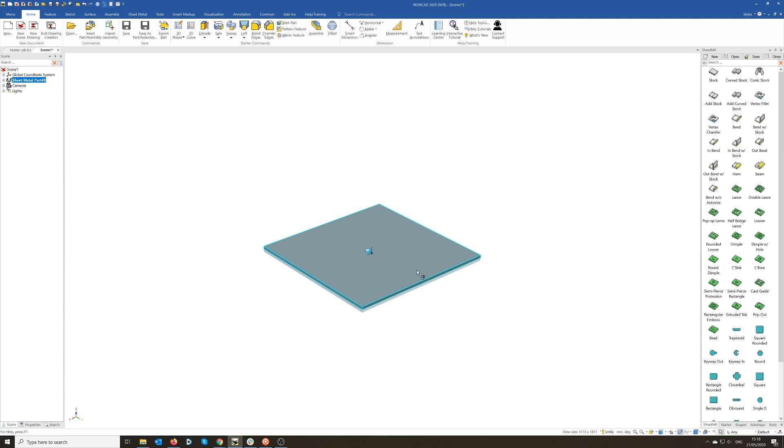So I want to make this one, and we said it's 700 deep, so I've got 700 this way, so put 700 on, and that allows me to grow both sides so it's symmetrical about that point. I'll do the same for this one here, and I'm going to make this one, we said 1500, so we do 1500. There we have the sheet metal top.

It needs a side now, so what I need to do is drop some sides on, and I have 2 different ways. I can do an in-bend and out-bend. In-bend means that the inner dimension is important, so that's what we'll keep at the 1500. The out-bend is the outer dimension is important, so you'll take material away to make sure that the outer size is within what you specified. So I'm going to do an out-bend.

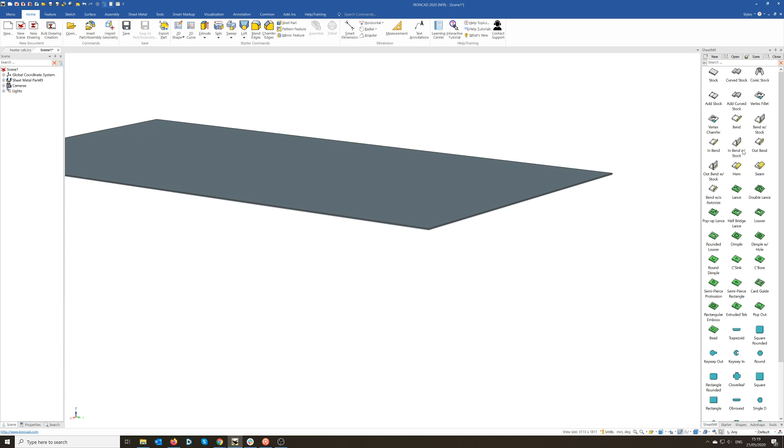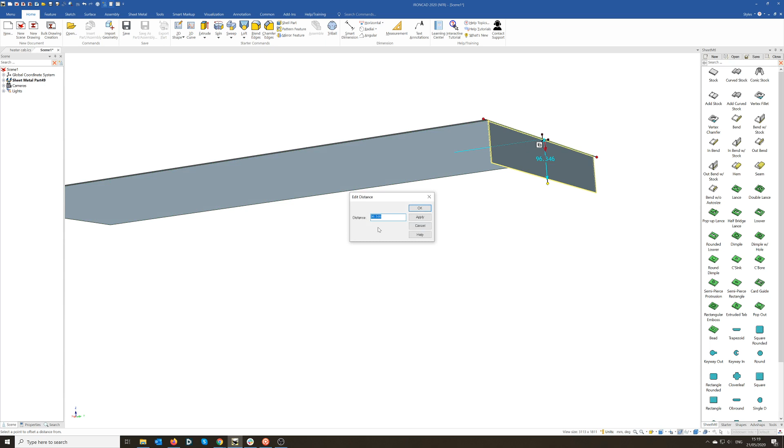I'm just going to drop it onto there. And it gives me these handles here, so if I want to, I can pull it down, or I can then right click on there and say I want to snap from a point. I want to just pick that surface there, and I said I need that to be, shall we say, 50 millimeters.

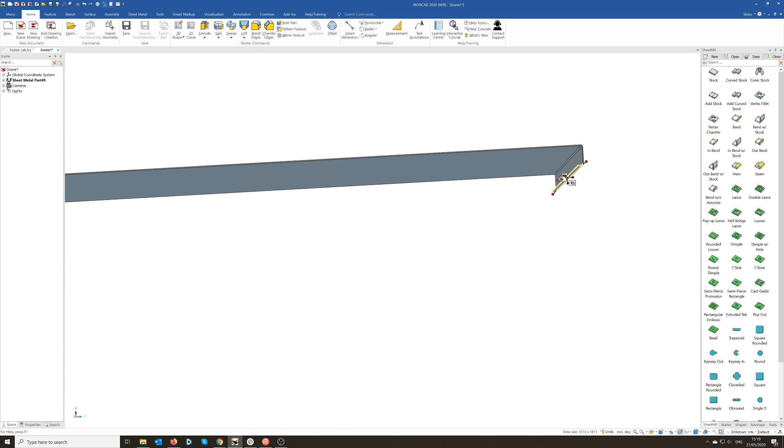I want to put a top edge in there, so what I shall do is another outer bend. I should just drop it on that corner, and I'm going to this time choose a value of 25, and there I've got the top one side made. What I need to do is I need to add it all the way around the edge. I don't have to repeat this.

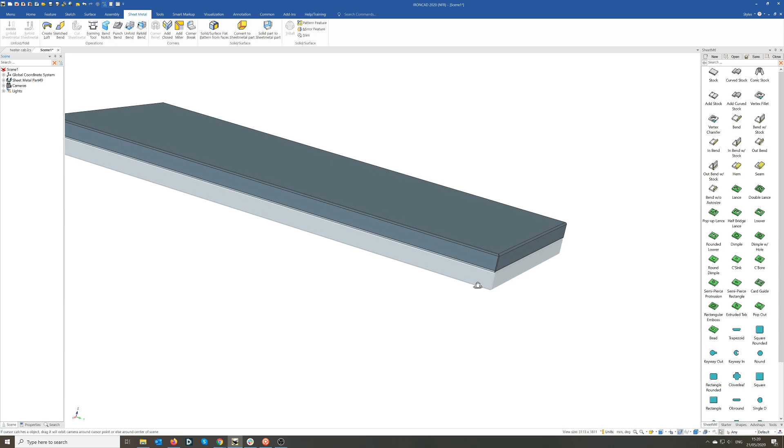I've got a great utility, so I go to the sheet metal tab at the top here, and I've got add miter, and then as soon as I select that, it asks me to pick what I want to add as a miter. So I pick those 2 parts there, I pick the edges, and I should be able to just pick those straight edges along there and say OK, and there it's created that top part.

So if I go to there, I can actually change the name. So I'm just going to call this plain top, and I'm working with stainless steel here, so I can go to one of my other catalogues with textures and I just drag in and drop chrome on that one.

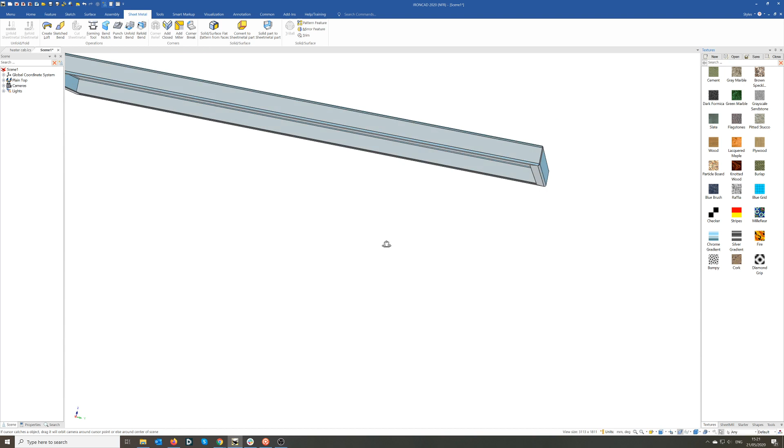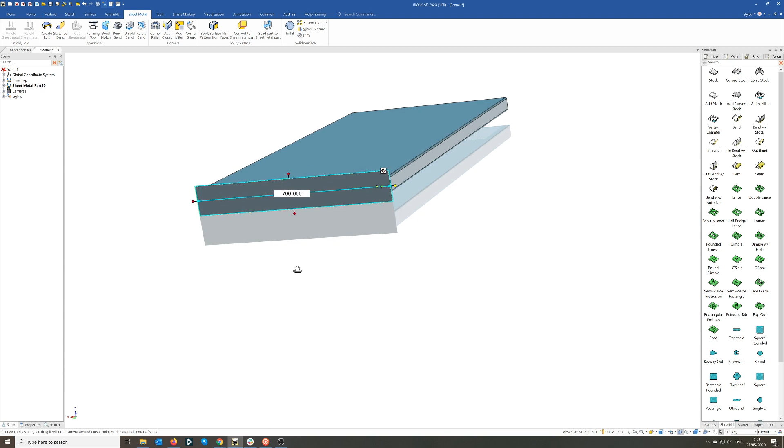So let's put some side panels on then. So let me add some more stock in. So I go back to my sheet metal, drag and drop a piece of stock on there, and I want the stock to be the same size as the width, so I just need to put it on like that, and you can see it has come through at 700. That needs to come down a bit.

I'm going to drop this one down to here because I want to pick that edge there, but you'll notice because I dropped it on the top, it's offset, which is obviously not what you want. So we use a TriBall, and we will move the TriBall to a position so that we can put it in the right orientation.

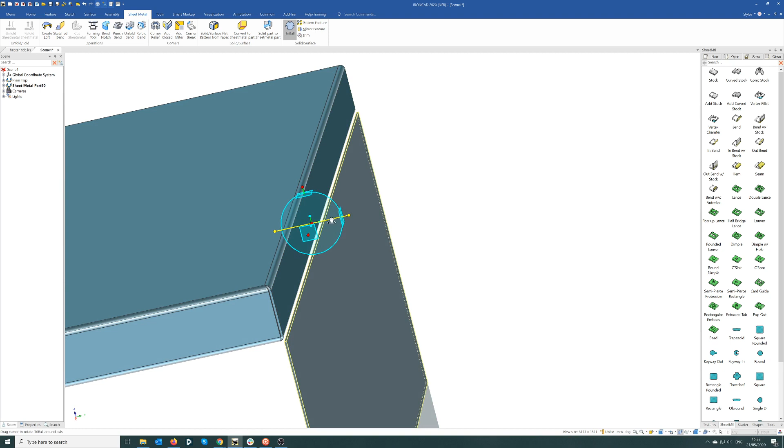If you see that it's actually on that face there, so I unlock the TriBall, I'm just going to move that up to that face. I then relock the TriBall and move it to that face there, and you can then see that it's in line. That's great. Turn the TriBall off, and I want this part here to be, and we said the height was 850, take off 50 for the top, so it's 800, 100 millimeters for the feet, so we call that 700.

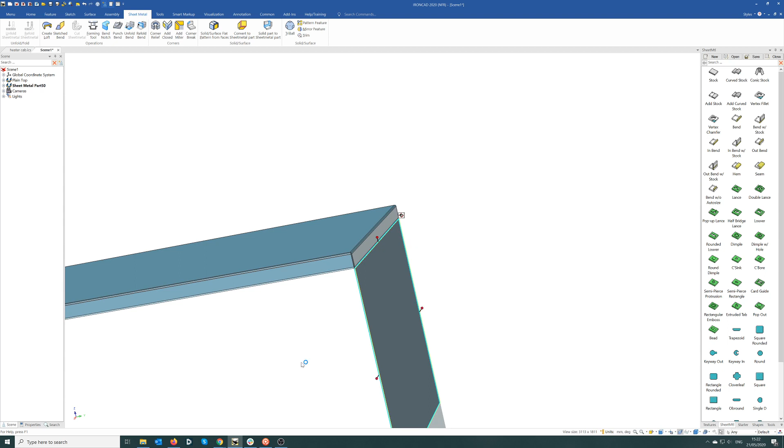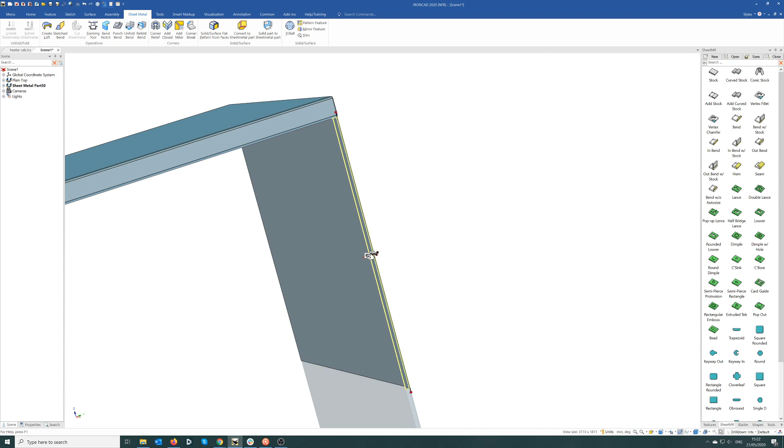And it's going to be a hot cabinet. Even if it's a chiller cabinet, it would possibly be double skin, so I'll just quickly knock another side panel on. So what I'll do is I'll do an outbend, because I want to keep that dimension the same, and I want to then choose a distance from point, and I'm going to choose that, and I'm going to say that is, if we look at the thing, I should imagine it would be, I would say, 25 millimeters.

I would then do another bend as well, so do another outbend, just drop it onto there, and I then choose distance from point, and I'll pick that edge, and I know that I want that to be about 25 mil, because that's what we made the thickness, so if we say 25 mil on there, and there I created one side panel.

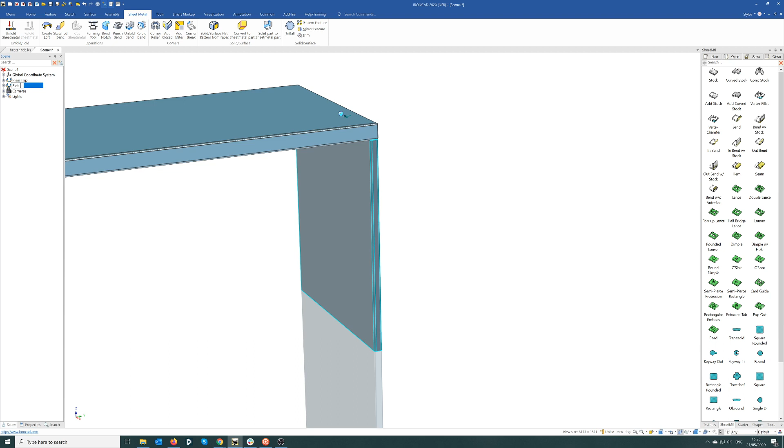What I need to do now is put this on the other side. I don't have to recreate that, I can just select that part. I'm going to call it side panel. I'm going to put the triball on, and I'm going to unlock the triball.

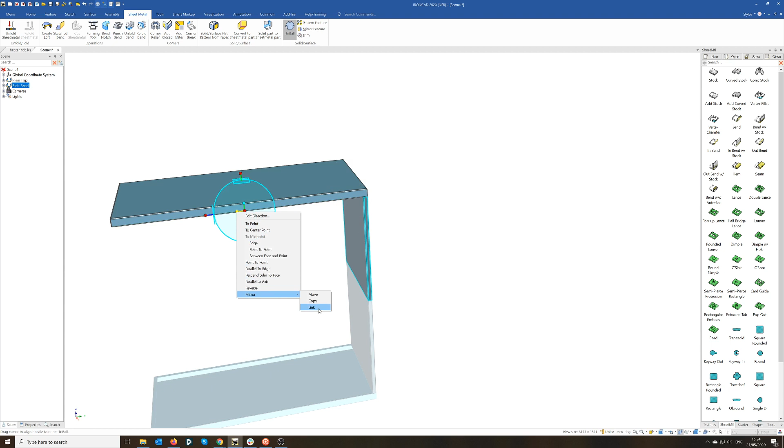I'm going to put the center of the edge of that edge there, relock the triball, and say I want to mirror link the other side. And there I've got two sides on quite quickly. Let me turn perspective off because I don't like that. And now let's put the back on.

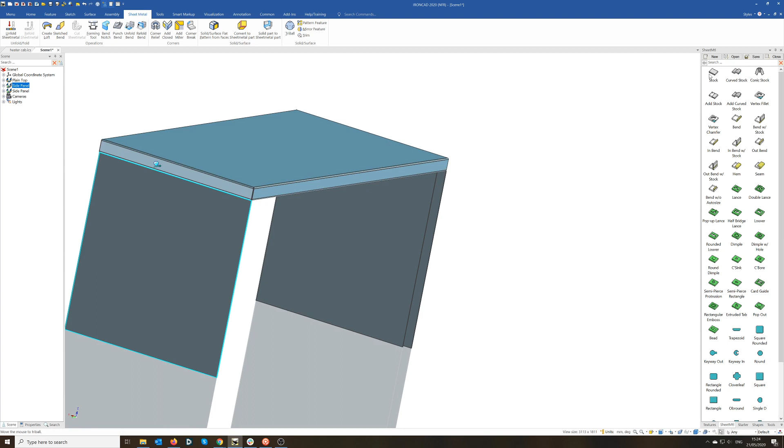And what we can do with the back is we can drop something on there. So let's just drop a piece of stock. Let's take it all the way down to that edge, and you can see that I don't have to keep referring back to other geometry and bits and pieces. I'm using the geometry in situ within the scene, which makes it very quick and easy to create what you want using existing geometry, which makes working with IronCAD such a pleasure, and you can be so much quicker as well. So let's just put that to there.

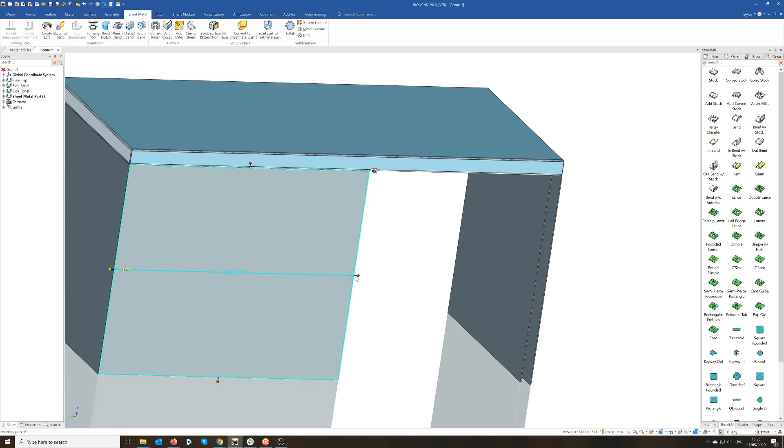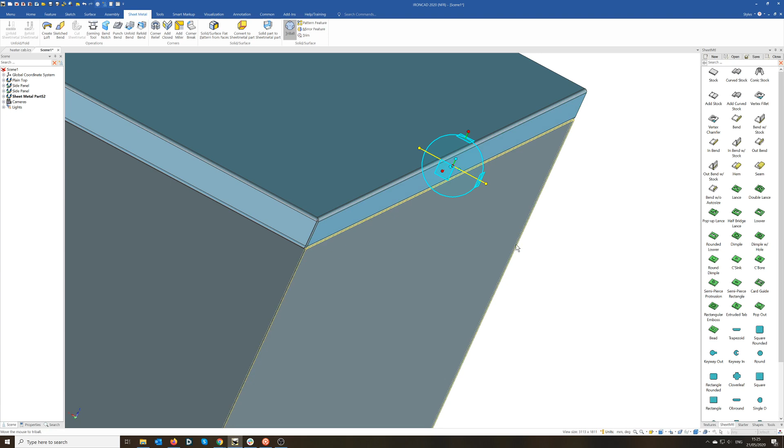Actually, I need to just move that back out because I need to pick that face there, and I'm going to do the same for this one to there. Once again, you notice our stock is slightly proud, so what I need to do is just unlock the triball again, fix it in axes, just say I want to go to there, relock the triball, and then say I want it to go on to that face there. So by using the triball, we've now made the back panel.

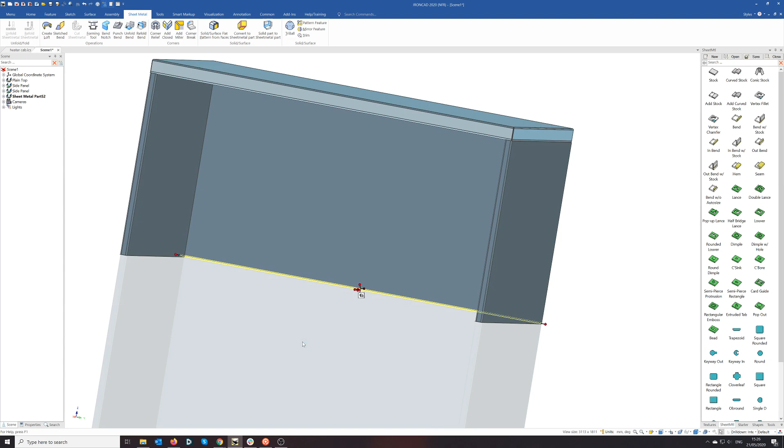But what I need to do is put the base. Well, I think you might make the base out of one because you don't want to keep welding and doing things up like that. So turn the triball off. I'm just going to do an outbend on that edge there, and so let's zoom out a bit. So let's just pick that point there and say I want it to go to that face. So we've got the base done.

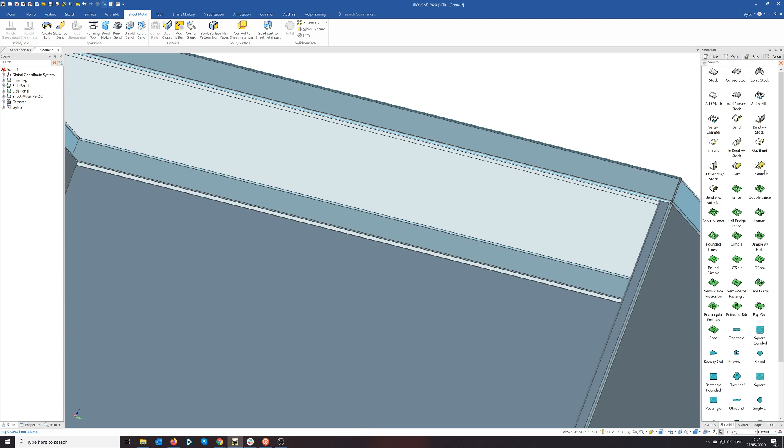We got the back, and I think that the back would be double skinned as well across the top. So I might actually just put a sheet across the back. So I'm going to go to my edge here, and I want to make sure I'm actually on the right part. Okay, I'm going to do an outbend on that edge.

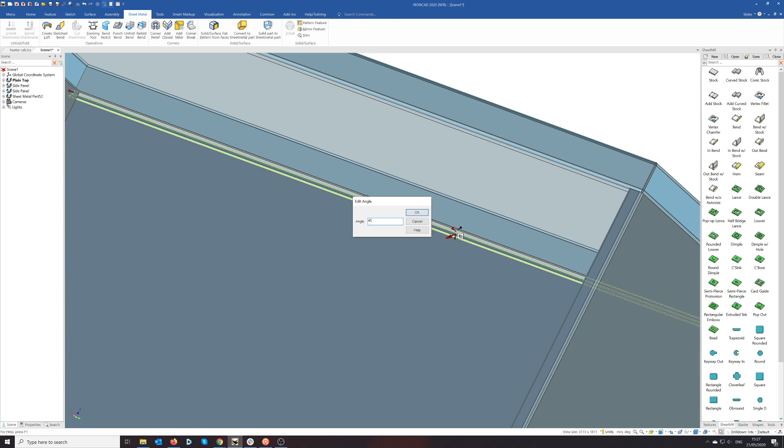It seems to have put that at a strange angle, so let's correct that. That's 90. Let's do that at, say, 45. That's not done that good at all, so I'm just going to delete that and drop that part in again. I don't know what happened there. I think I picked the wrong edge actually.

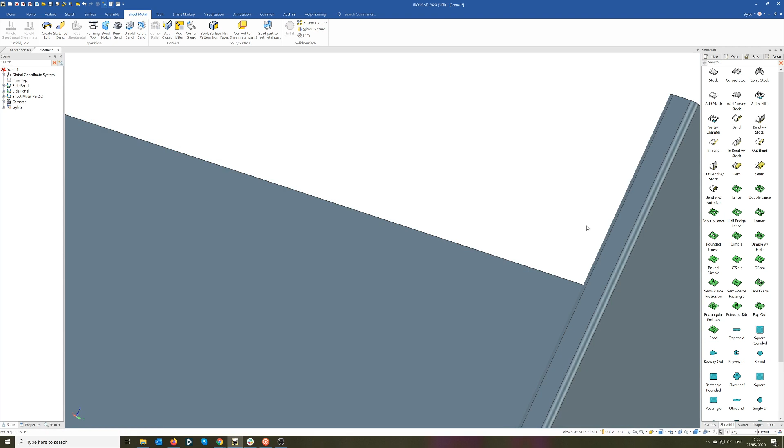Why don't I just hide selected, and that will give me the opportunity to put the right bends on, etc. So what I'll do is I'll do another outbend, and I shall just move this forward, and I'm going to choose that edge.

But what is interesting, because I've got a bit in the middle which I want to do, I don't have to go in and edit profiles. What I can do is, if I add stock, I can actually select that part there, and I'm going to then choose the stock size and say I want to go on to that. Let's just put that to there a moment, and there, and I shall then choose a value for there.

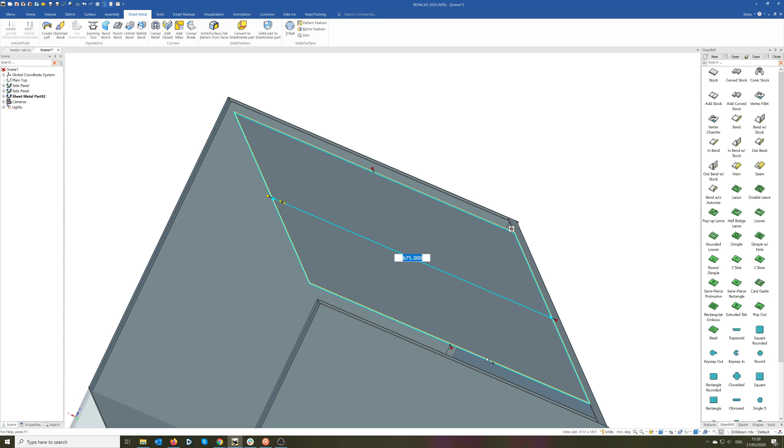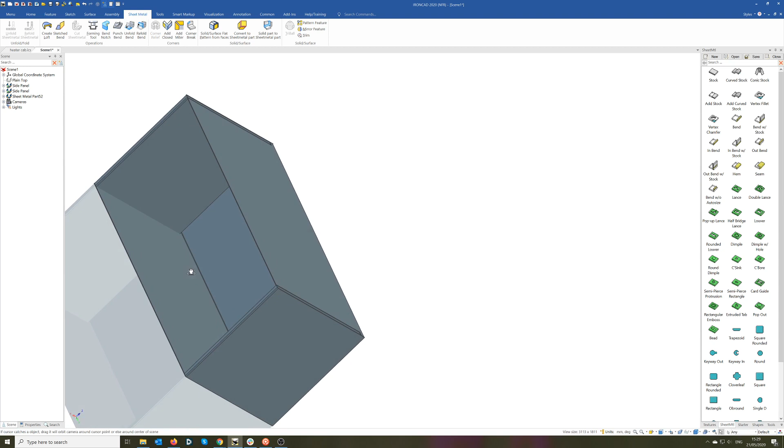So what I want to do is use that face and that face there. So if we now have a look at that, we've got the top which is joined to the bottom, so we can actually unfold that. So if we unfold that, let's have a look at that part, and there you can see it's done that cutout for the top.

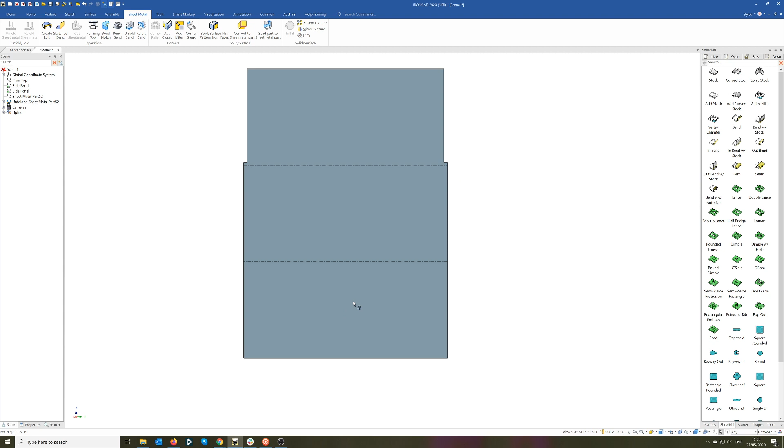Okay, now the beauty of the way that we're working, because it's free-flow format, is that I can say, actually, I didn't really want that part there to be from the base. I can actually utilize the part and do the back, or I could just add in an extra part for the back, but I'm not going to worry about that for the moment, because this is just an example of what we are trying to achieve here. So let me show all.

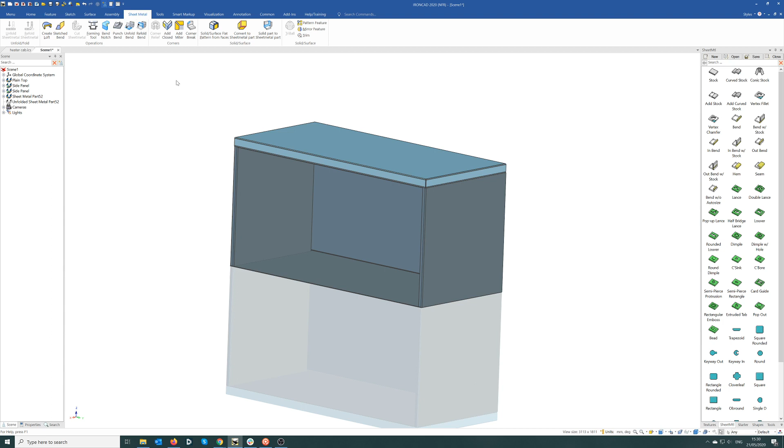Let's put the top on, and you can see I've got different materials. So what I can do is go to my visualization, do the eyedropper, and say I want, oh no, that one. So let's fill the eyedropper with that one, and then go and select them. Turn that off.

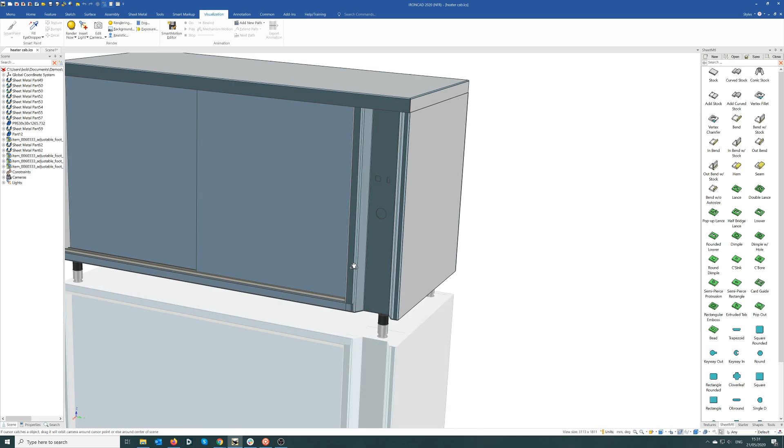And what I'll do now is I need to make the control panel. If you remember from the original picture, there is a control panel, and this is one that I made earlier, which you can see is quite an interesting shape. So it zooms in, it recesses in, and so forth. Now I can do that quite easily. So I will actually just make a shape like that, and I'll show you quickly how we do that based upon some dimensions.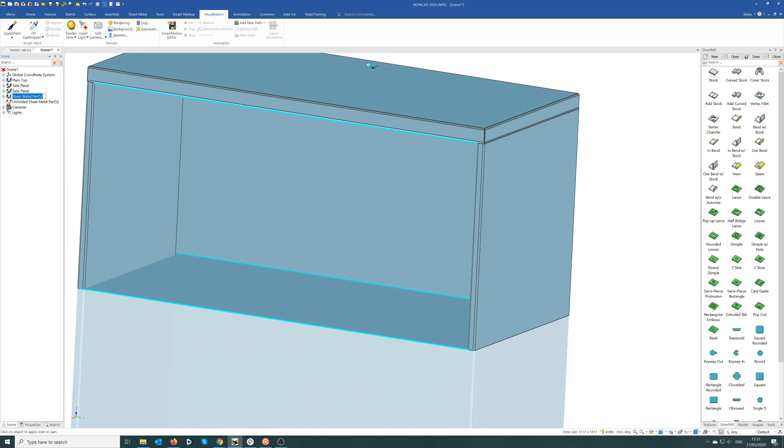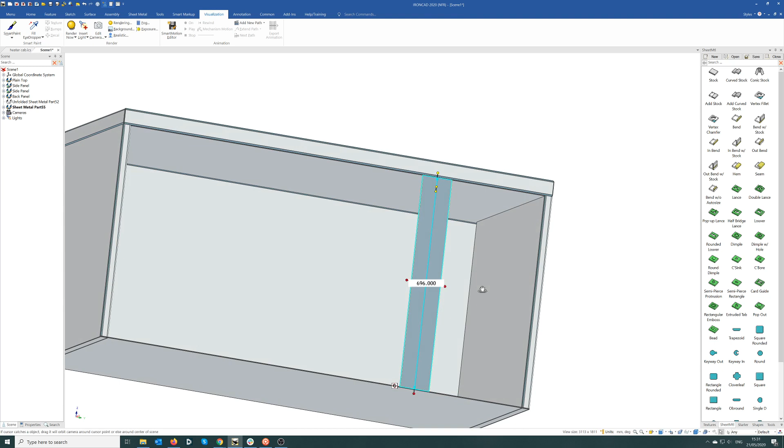So once again, I've got the sheet metal part, and I'm going to call that back panel. I'm going to drag a piece of stock in, just drop it on the top there. I want to drop it down to the floor there. Let's just zoom in a bit, and I want to take this and select that top surface there. Now I need to know the size, and I'm going to make this one, we'll say 80 diameter. So we made that 80 across there.

I need to put a bend on there, so I shall drop an in-bend this time, just for a change. And we can use the grab handles to choose the angle. I'm going to edit the angle and put that at 45. And take that point, and I'm going to edit the distance from that point there, and I'm going to make that, I don't know, 50 millimeters. You can make it bigger actually. Let's make that 100. There we go, that looks a bit better.

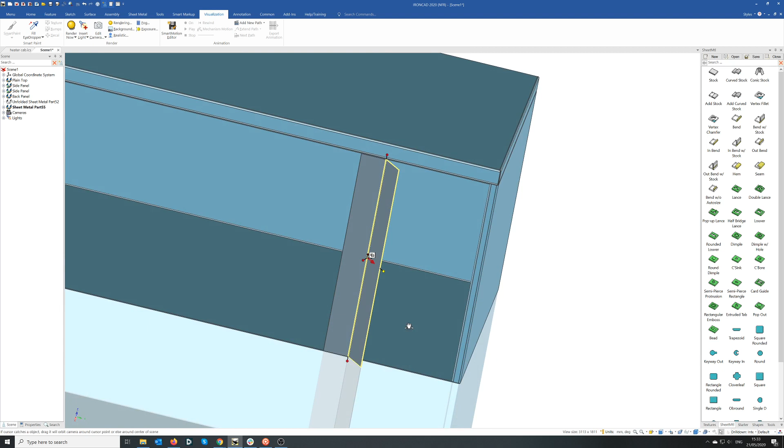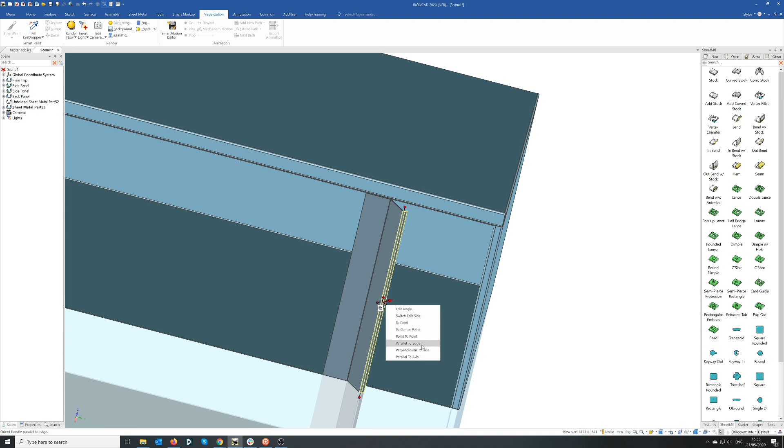I need to put a return on there, so I'll just do an out bend on that edge, and that has put it obviously in the wrong one, which is not a problem. It depends on the edge you pick. If I then select that, it will bend it the other way. And what I can do now is on the radius, I can right click on that. I want it parallel to edge. Let's just choose that edge there, and it's put that bend in line with that.

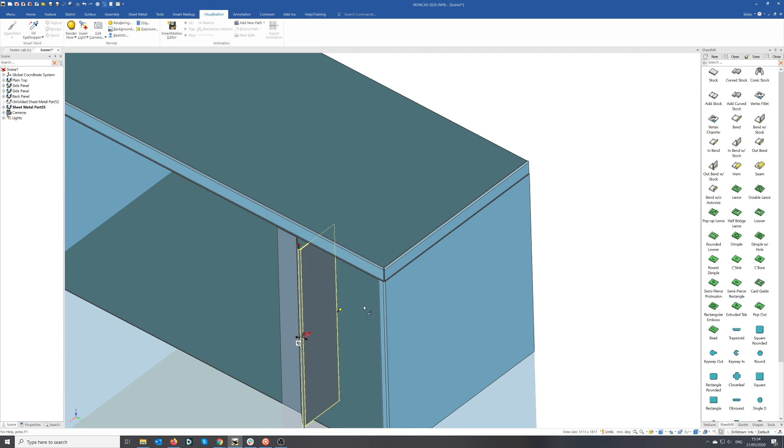I can then say I want to edit a distance from a point, pick that point. Actually, no, I won't. I'm going to drag that further in, then say I want to edit from point, because it goes normal to that surface, and if it's below that it'll try and shrink it so it disappears. And this time I'm going to make that 150. So I've got basically one side already created.

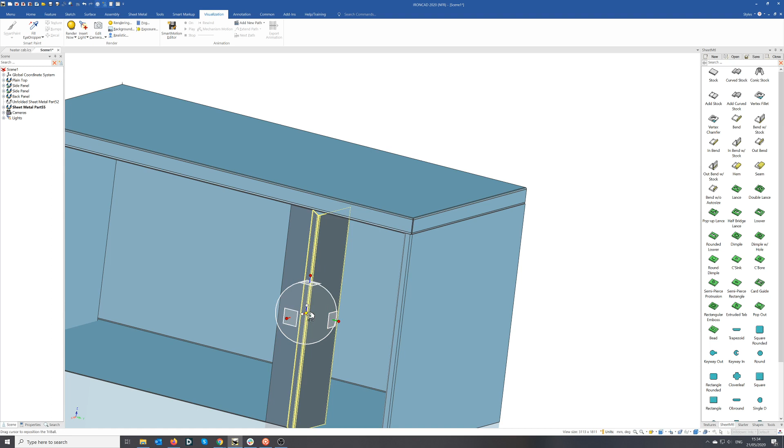I don't need to do it again. I just use the TriBall. As you can see, we use that quite a lot within IronCAD. Let me unlock the TriBall and just align it to global. And then I'm just going to move that and drop it down to the center point there. Relock TriBall and say mirror copy.

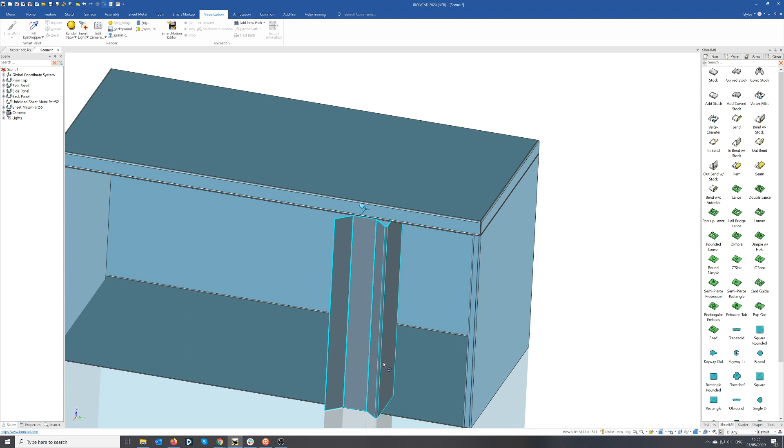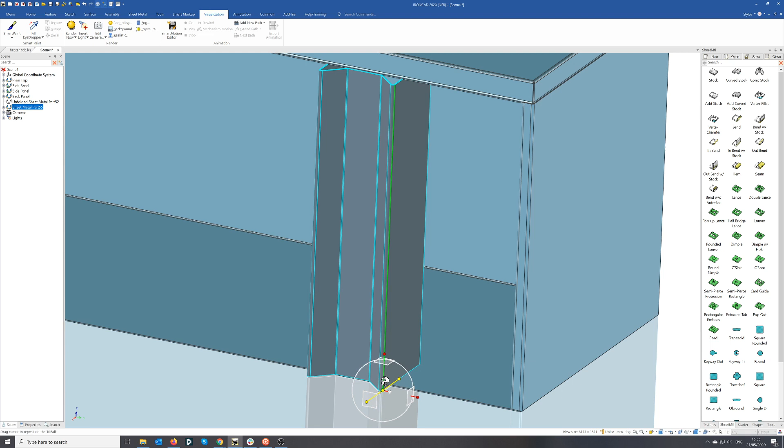So we put the TriBall to a position where we want to work from. So I'll unlock the TriBall. I'll drop it down to a point here, and let's put it on that face there. See, it's furthest point, and what I want to do is relock the TriBall, and I'm going to move that TriBall and I'm going to put it there.

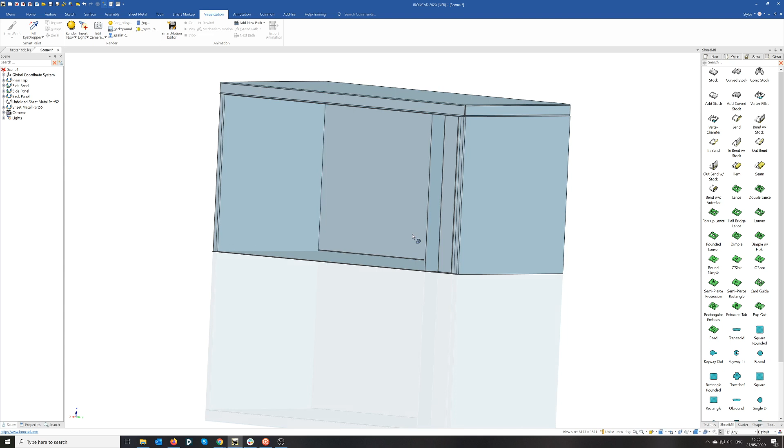And there we can see we've added in our control panel. I can go and change the color. So what I need to do now is add a runner at the top and the bottom to make sure that I've got the ability to slide the doors in and out. And the way that I'll do that is, let me just change the name of that first off. I'm going to call that control panel.

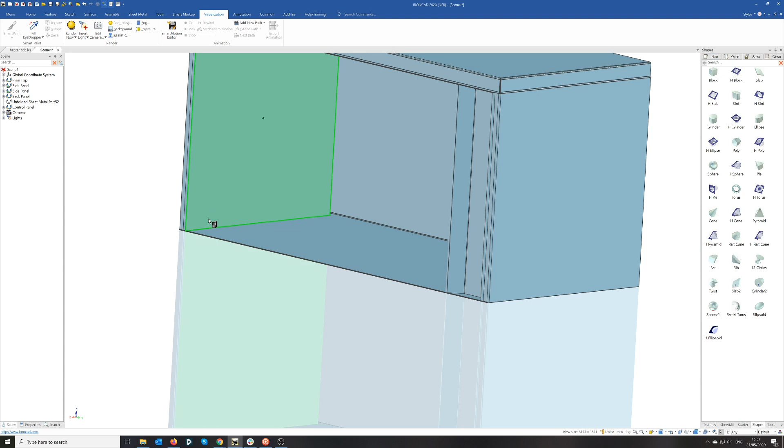The way that I'm going to do that is I'm going to not do sheet metal this time, but I'm going to go and drop a part in. I'm just going to drag and drop a part on that edge there, and I'm going to drop it as a new part. It asks me, it's a linked feature, do you want it on the other side? In this case I don't, but it's a really handy feature if you want to add parts to a linked feature, which will then be replicated throughout the model.

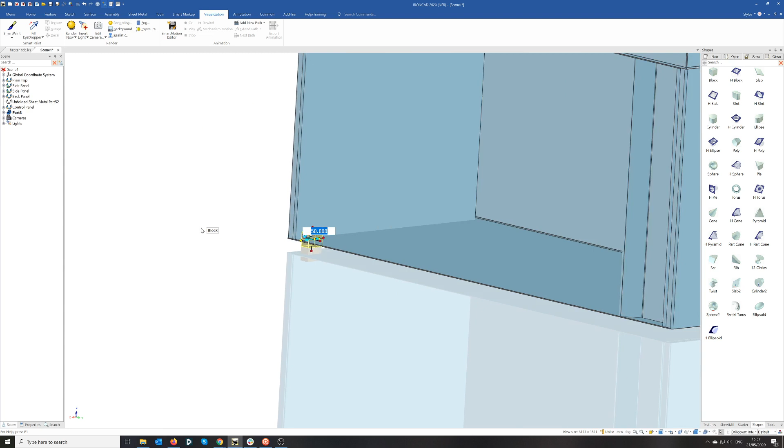And if I click on that and go to the IntelliShape grab handles, I can move this up to the points that I'm interested in. So I want to actually make this 60 diameter, and so that's 60. Let's just move that out that way, and that way is going to be 20 millimeters up.

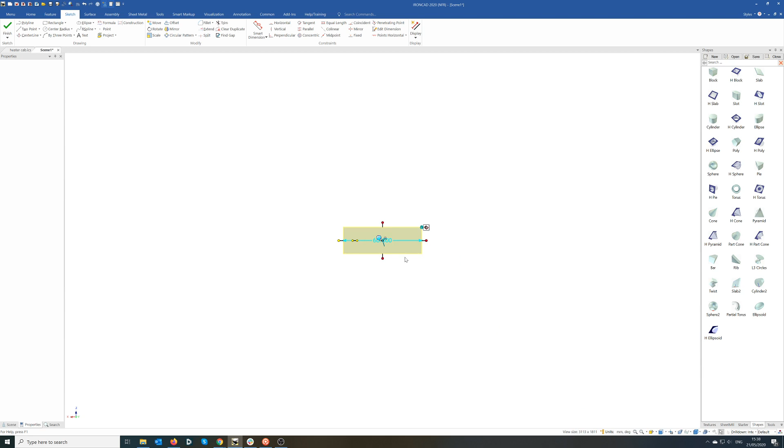Now you see the blue handle there, that's telling me the way that the extrusion's going, so I know that if I want to edit the profile shape, it's going to be on that face there. So all I do is edit the cross section. Let me put it in position so I know which way I've got to build my profile. Okay, so let's hide all. Just look at this, normal to that. Let's zoom in a bit.

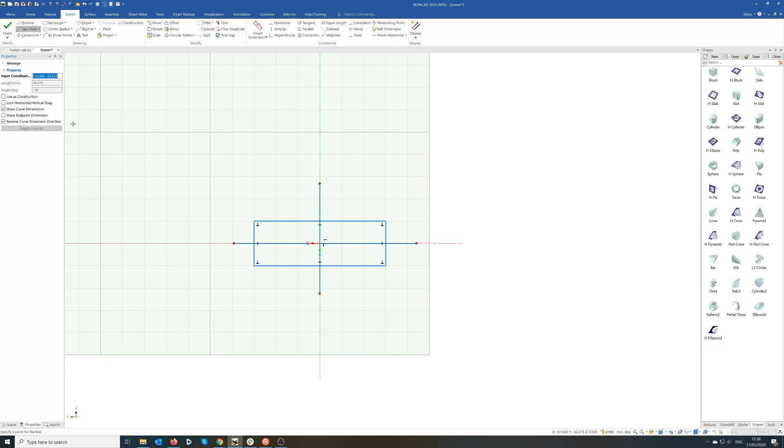So I need like a castellation there, so I want 2 runners down there. So what I'll do is I just add some geometry in. I'm not too worried about what I'm doing here at the moment. What else do I need to do? Yeah, I think I'll do an offset around the middle. I'll just pick that line there, and I want it bi-directional. I want it 5.

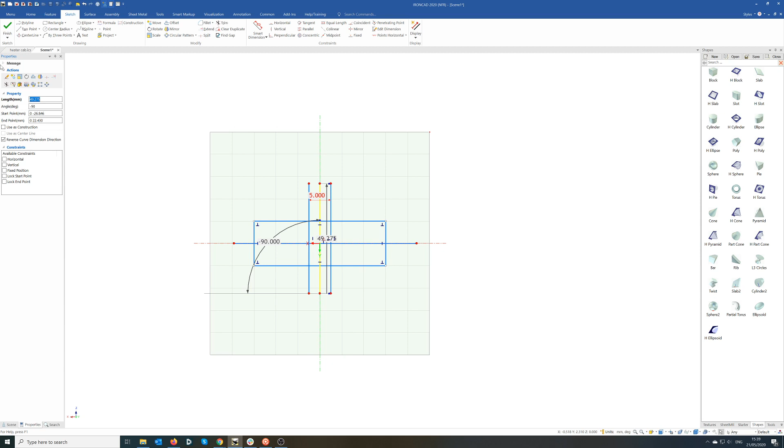Okay, I want to mirror, move, but I'm going to do a copy. I'm going to make it in the X, 10. Sorry, I need to cancel that one because I've got the wrong line selected. I need to select that one and that one, and I want to do an offset. I don't need it bi-directional. I just need to flip the direction in, and it needs to be 10.

Okay, so I just need to trim away the parts I don't need now. So if I go to the trim section, I can take out those parts that I don't need. It's saying you've got a number of curves on there. Do you want to continue? Because it will take them out. I'm saying yes, that's fine. I do want to do that. And I want to say yes. And let's have a look.

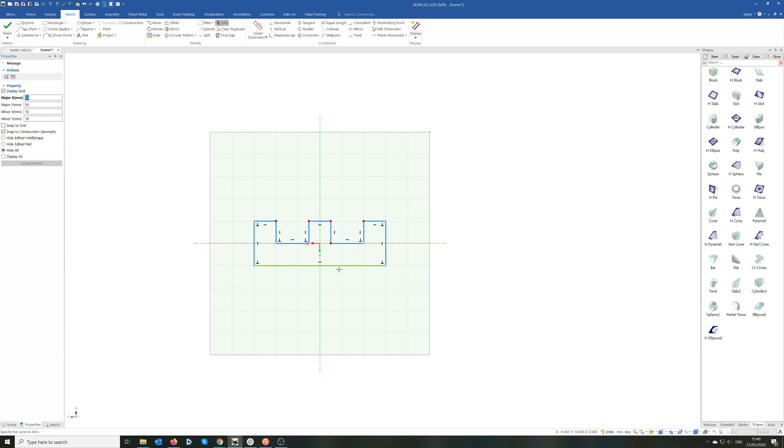That looks like we've got all of the parts there. Let's then make sure we've got no duplicates. So I'll select them all. No, there's no duplicates in there. Those red ones mean that the entities are not closed, which I just want to make sure that they are.

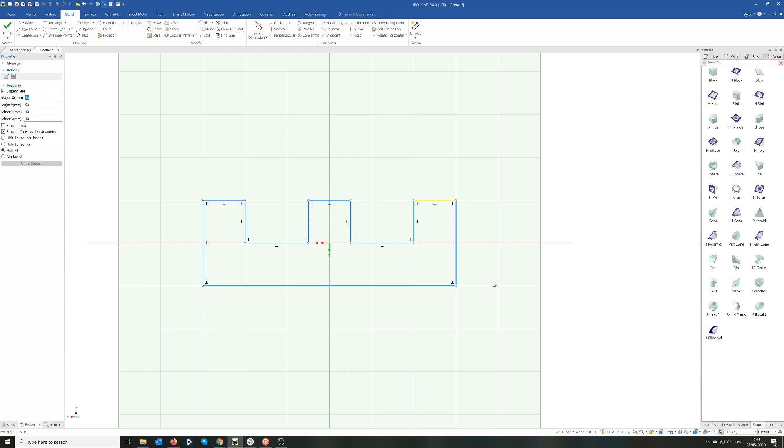And it's all white, there's no red parts in there, so we can just say finish. And there's the profile. I want to just take that edge and put it onto that one. And there we've got

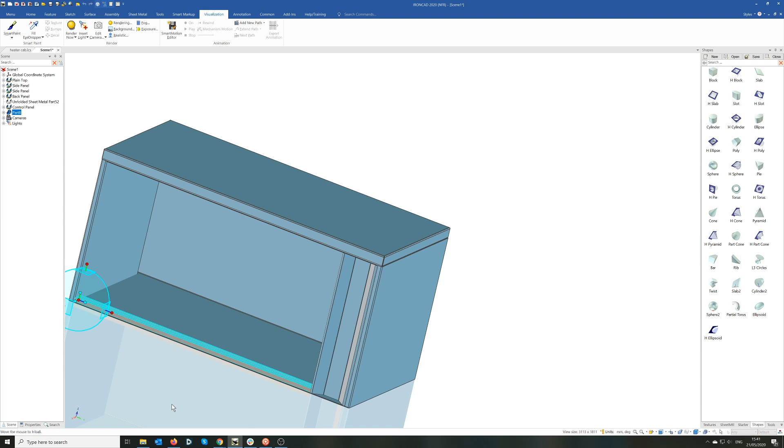the bottom runner. Well, guess what? If we want to put one on the top, we turn the TriBall on. So what we can do is unlock the TriBall, say center of edge, pick that edge, relock the TriBall and say mirror link, and there we've got our two runners in position.

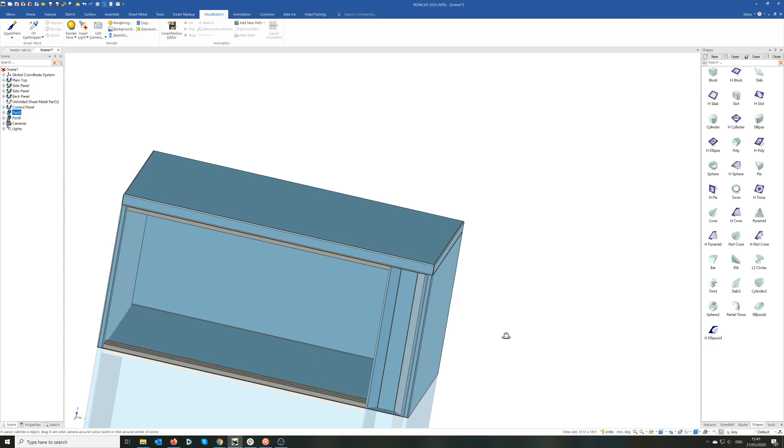The remaining thing to do is to put a door on. Actually, there was something I could have shown you on the control panel which I didn't do. So if I go back to the control panel and click on the sheet metal tab, I can drag and drop in a punch, and by clicking on those dimensions, you can move them around so you can position it very accurately.

I just put the center part in, and if I zoom in, because the default is quite small, then right click and click on tooling properties, so you have standard size punches, which you can put in, or you might only want to use certain ones, or you can put your own custom ones in.

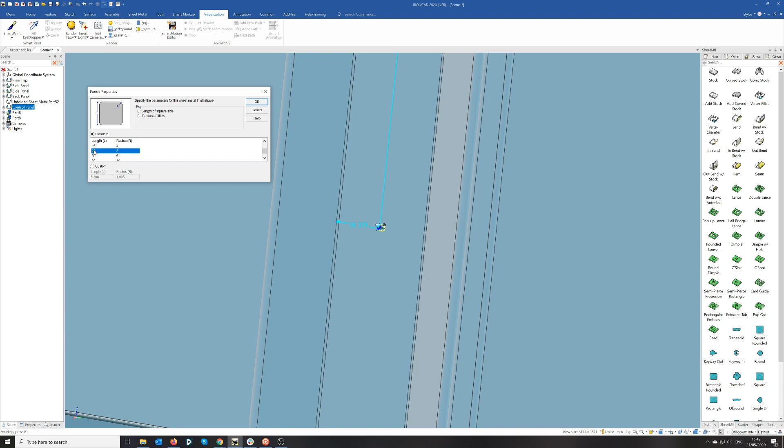So I'm just going to put 16, let's do 20 by 5, and it's made a punch hole in that control panel. And the reason I've done that is when I finish doing the doors, you'll understand why.

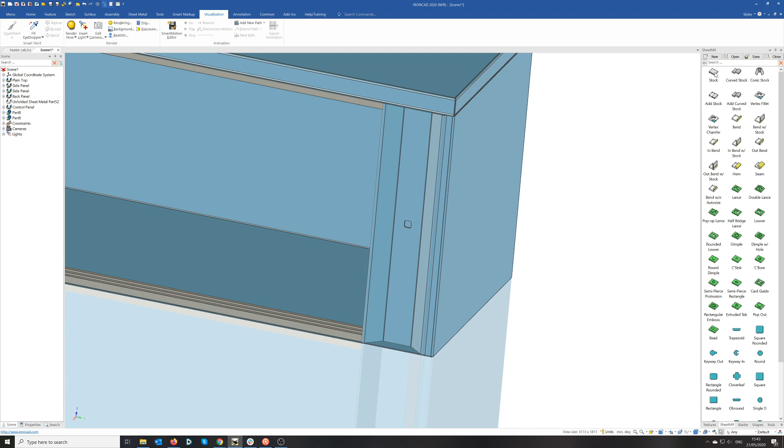So I have the cabinet in position. All I need to do now is add in a door. I'm just going to do them single skin, but they will normally be double skinned with a handle on. I'm just going to do single skin to start with, just to show you.

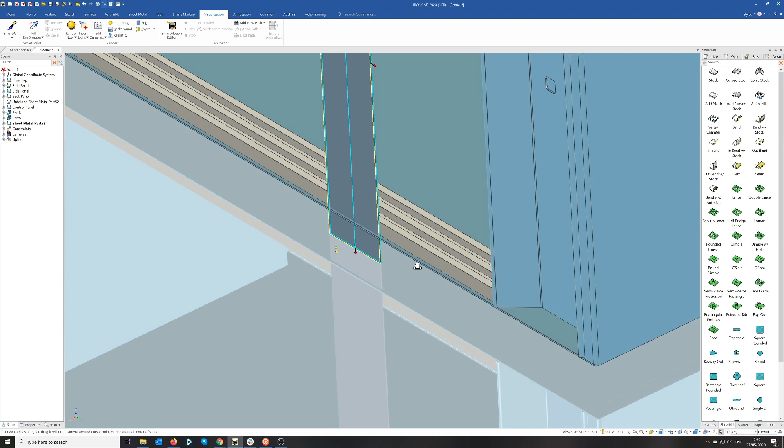Just drop a piece of stock in. Obviously I need to move it into position, so let's just move this up a bit. So let's zoom in and have a look. I want that stock to be on that edge there,

I need it to be up on that edge there, so I'll just move that up to that point, and it looks about right. So I'm just now going to zoom out a bit, and I want it that side in line with there, and let's just assume that it needs to be halfway along.

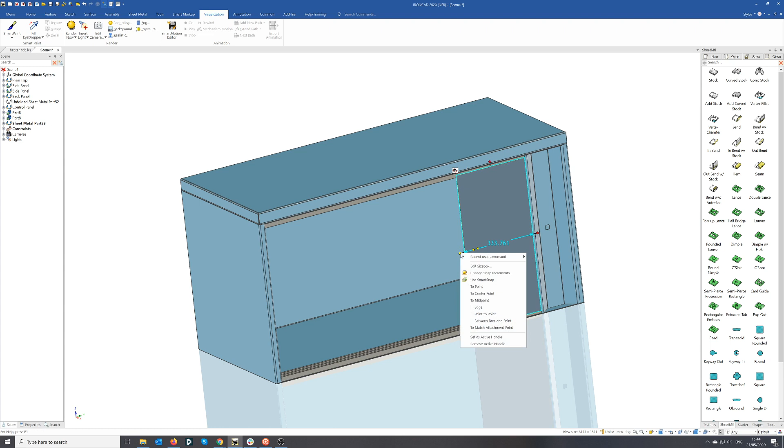They're normally either slightly over or whatever, but for the moment we'll do the midpoint, pick that edge. And obviously, once again, we put it on that top face of the stock, so it's in the wrong place. What I need to do is just say, okay, let's put that to the midpoint

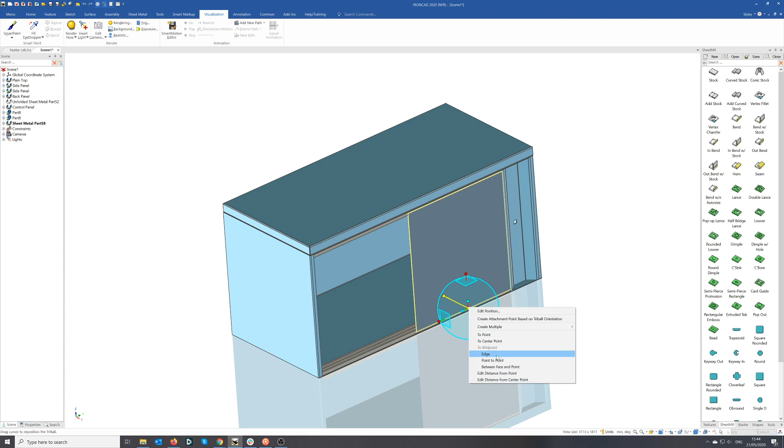of an edge, and I can then zoom in down here. I want to choose that edge there, and you can see it's put it in the midpoint of that there.

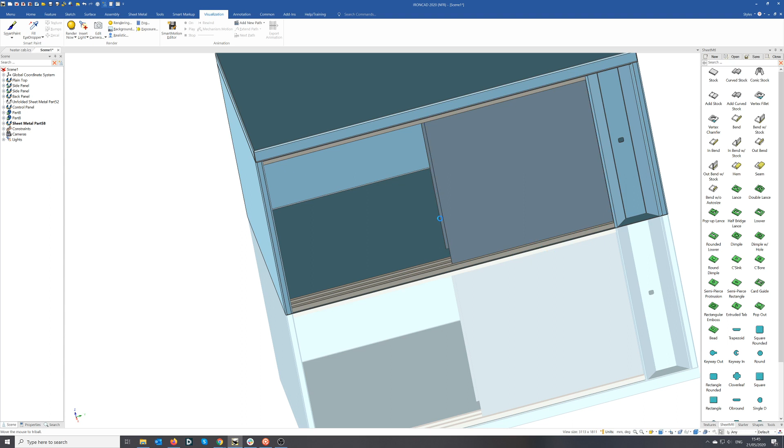While the tri-ball's still selected and there's two doors, I'll just move that forward, and I'm going to create a copy here. Just going to say okay, turn the tri-ball off that, select the second part there,

and I'm going to move that. So I'll put the tri-ball on, and I'm just going to move it out. I'm going to lock it in position there. I want it to be the midpoint of that edge down there.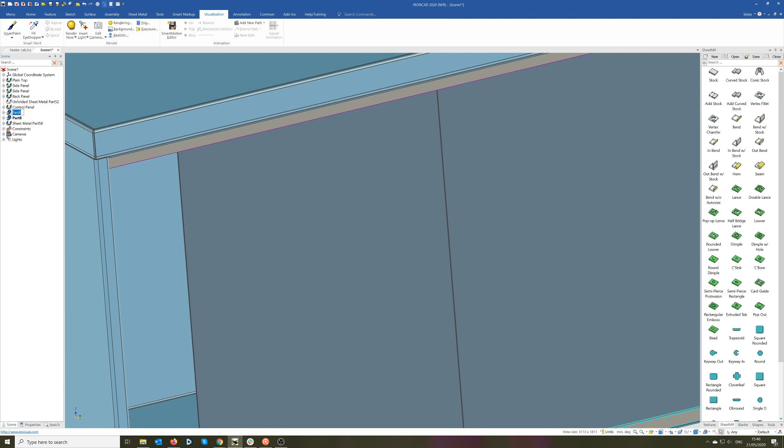And I'm just going to move that out to a point there, so it's showing the door open. Turn the tri-ball off and zoom out, and that is part 8, called door. So we've got two doors, and we've got the cabinet pretty much completed.

Obviously you could do more detail and fidelity on there, but basically that's briefly giving you an idea of how you would quickly make a cabinet. But there's a couple of things missing. There isn't any feet, and there isn't a control knob.

So actually, if we go to add-ins, we have two features which are part of IronCAD, called TraceParts Community and CADENAS. CADENAS is all electronic parts, and you have a mixture of electronic and mainly mechanical parts in TraceParts. You need an account, but then they produce, you can then download and get models.

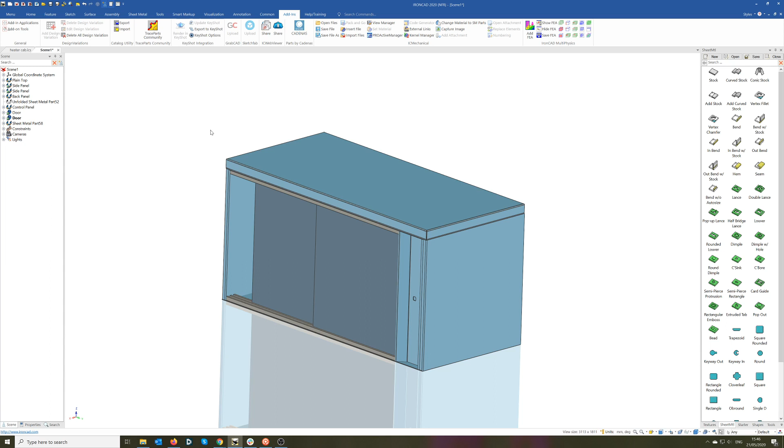So if I was to just say, for argument's sake, I wanted to add in a part here, like a control knob, it will actually bring and drop a part in directly for you. So if I do a search and I put control knob. Let's have a look.

It'll do a search for all these command words that you've looked at, and if you wait for it to populate properly, and scroll down a bit, that's the one I was looking at. It brings the part in, enabling you to have a look at it and see if that's what you want.

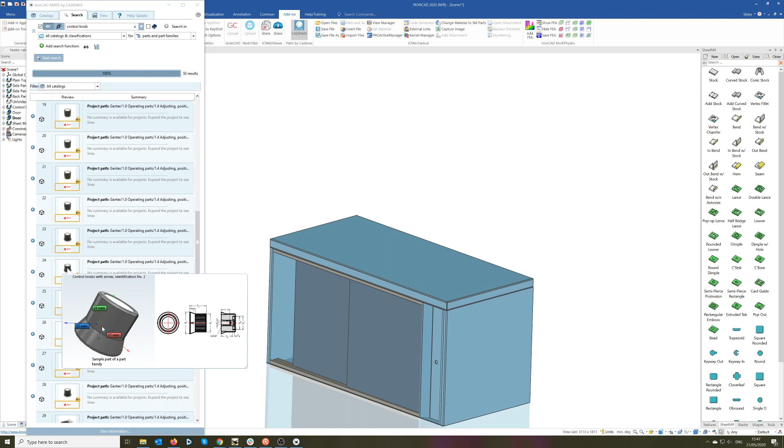If you say yes, you can then open the part and rotate it around, making sure the dimensions are correct and everything. Then all you have to do is add that part to IronCAD by saying transfer to IronCAD. As soon as you do that, it'll bring the part in and drop it on the IronCAD scene, and there we go. I can then stop that and open it up.

Let's put the triball on, and move it out so you can see. Just zoom in, and there we've got a control knob which is actually in the center.

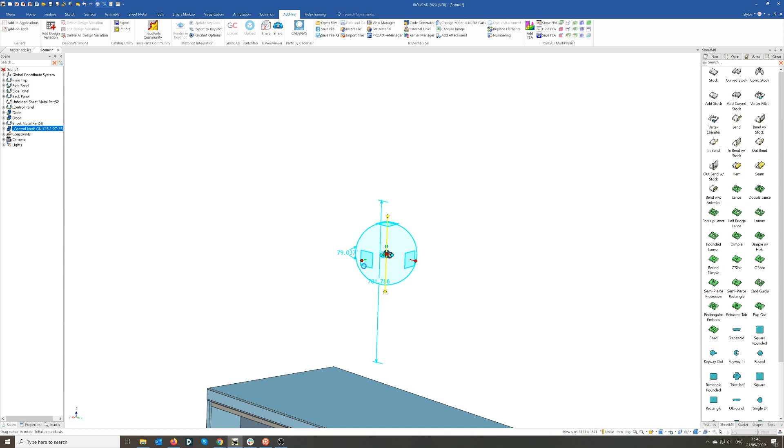Let's rotate it round this way so we've got the right orientation. Let's make that 90 degrees so we're in the right orientation, and what I'll do is drag and drop it down to here. Whoops, went in a bit quick there.

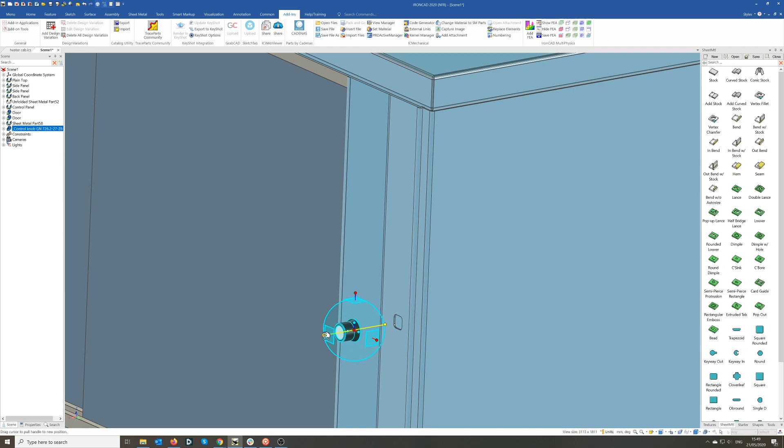Just move out a bit. I want it to be the center point of that edge, just to put it in the right place, the center point of that edge, and then I can say I want that to be on that surface. There we go. Turn the triball off, and there you have your control knob on to adjust the temperature, etc.

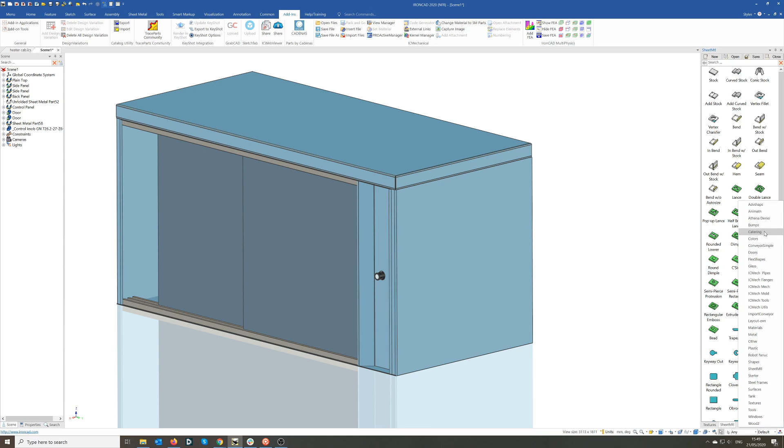I have some others. You do the same thing with the TraceParts community to get some feet. What I've done is I have a catalogue which I've saved called Catering, and I have an adjustable feet there. So if I select that and just drag and drop that part in, you can see it drops the part in.

It's in the wrong orientation. Let me just move that out a bit. Let's rotate that round 180 degrees.

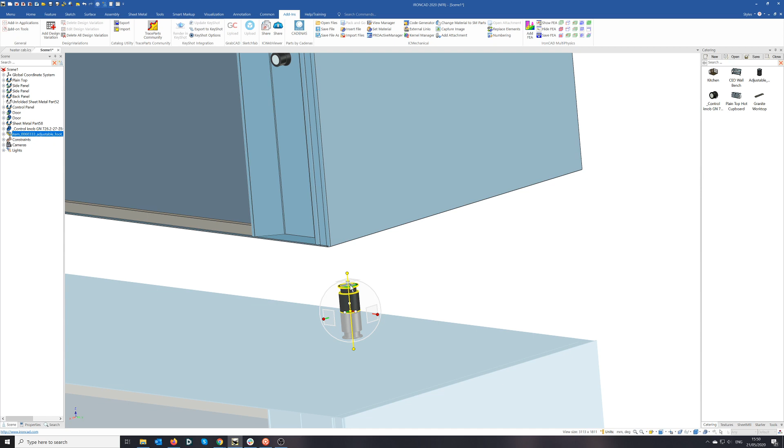And let's move the center point of the triball. I'll unlock the triball, and I'm just going to say I want it to the center point of, zoom in on there, relock the triball, and I'm going to put it on that edge there. I need to come out a bit.

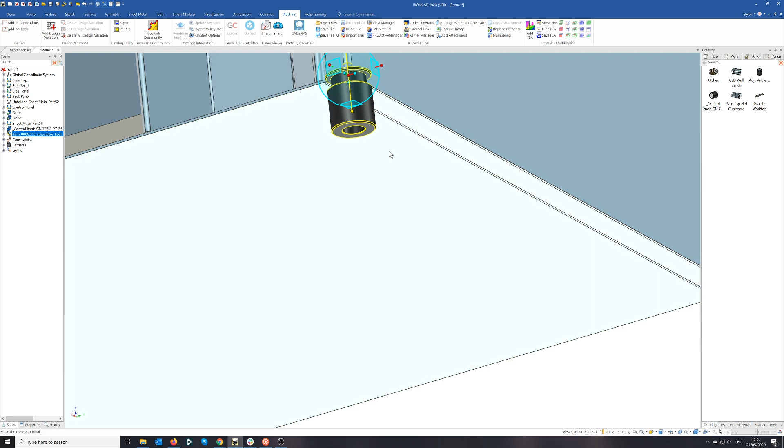Okay, and I want to pick that edge and move it across like that. I want to move here, and I want it to be 60 by 60. So I have a part there.

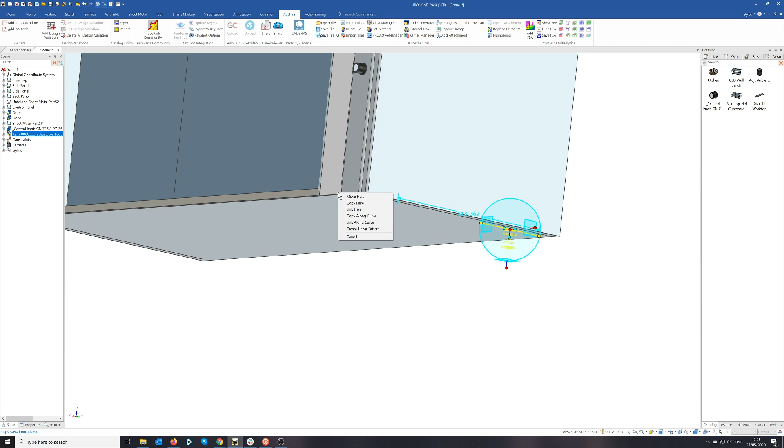I now need to, what I'll do is select that part, just copy it across down to there. I'm going to create a link copy here because I might as well, because if you want to change one, you'll change all of them. And I'm just going to say OK.

Select the triball on this one, and I'm going to say I want this to be a distance from an edge, distance from point, and pick that edge there. I'm going to make that 60, so in theory they're all in line. Okay, let's have a look. Yeah, that looks good.

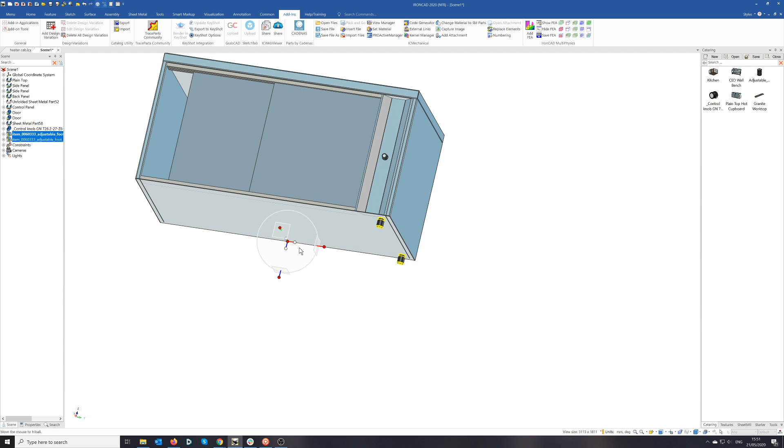Select the second one, use the triball because I want to mirror it over to the other side. So I unlock the triball. I'm just going to say midpoint of edge, pick that, yeah, midpoint of that edge, and then say I want a mirror link on the other side. And there we have it.

There we have created our cabinet. However, they're individual parts, so I can go in and change all the names, but what I would normally do is at this stage select them all and roll it up into an assembly.

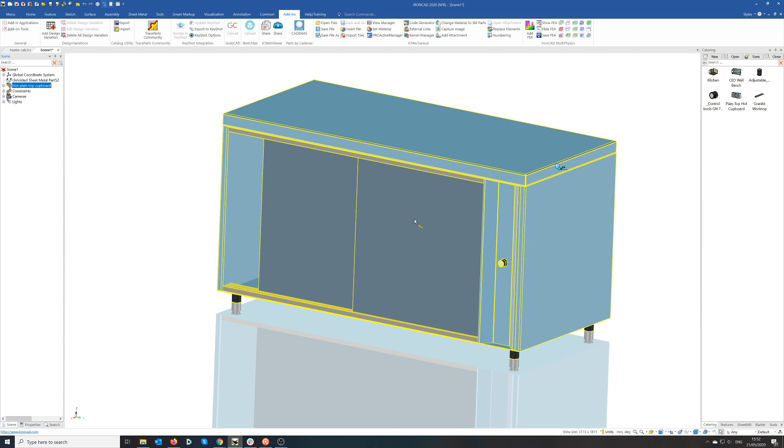And we call that hot plain-top cupboard, which is the name of the part that I was copying. Once I've got that, I can select it and drag and drop it into my catalogue, and I can have my hot plain top cupboard, which I can then utilise further on down the line, which I'll show in part 3.